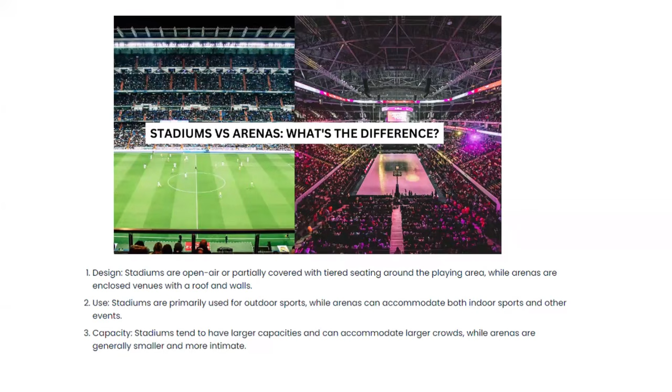So, in summary, there are a few differences. Stadiums are open, but arenas are enclosed venues. Stadiums are primarily used for outdoor sports, but arenas may be used for indoor sports. Stadiums have large capacities, but arenas generally have smaller or medium sized capacity. These are the few differences between arena and stadium.

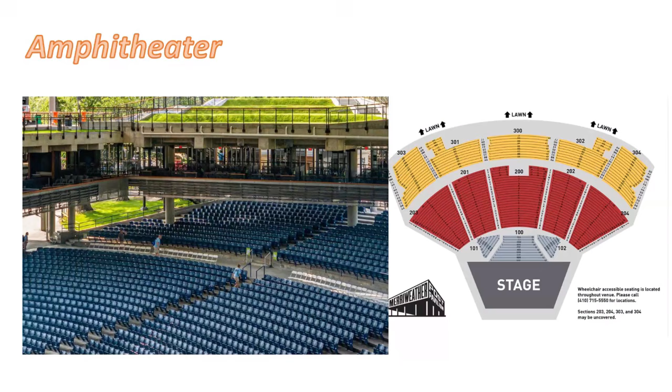One more term you should also know is the amphitheater. An amphitheater is a circular or oval shaped open air venue with tiered seating, arranged in a curved or elliptical manner. It usually surrounds a central performance area. Amphitheaters are historically known for hosting events like gladiator contests, concerts, chariot races, etc. The most famous amphitheater is the Colosseum in Rome. Amphitheaters are designed to accommodate a large number of spectators, also providing good visibility of events in the central area. So arenas, stadiums, and amphitheaters are all types of venues used for various events, but they have distinct characteristics and purposes. You should be familiar with these terms if you want to do IBS design.

So now the question comes, what makes a stadium so special? As I said, stadiums are venues which are completely different from other in-building scenarios. They have particular needs and challenges. Any design engineer should understand these needs and challenges in order to create a suitable design, because in a stadium, people with different backgrounds, interests, and expectations meet, and they should have sufficient wireless connectivity and quality of service. So stadium is very special.

You can see here we have various communities in stadium. The first community is visitors. Visitors come to the stadium for either an event, a match, or simply as a tourist wandering around. They normally make use of sitting area spaces, or in case of concerts, use of the play field. During halftime periods or breaks, they might access food areas, bar areas, or toilets as well. Often some of them want to share the latest goal with friends who couldn't come to the stadium, and they also make use of their mobile devices to send streaming data, pictures, or SMS. Moreover, in stadium we have VIP visitors as well, so we have to take care of them too. Sufficient coverage and capacity should be available in stadium for visitors, not only voice but also heavy data use.

Then we have stadium operations. What is stadium operations? Stadium operations refers to the personnel who work for the stadium on a daily basis. They also need to have coverage and connectivity, especially inside their offices. They may include people who work at the front office, stadium maintenance staff, or security guards. So they also need coverage and capacity.

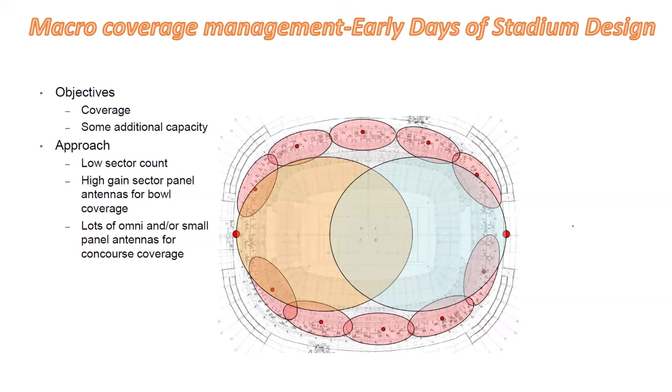Earlier, the focus was only on coverage. So the approach was low sector count, high gain sector panel antennas for bowl coverage, and lots of omnidirectional antennas for concourse coverage. We may have had strong signal from the macro sector pointed towards the stadium back in maybe 1999 or 2000.

But you want IBS to be dominant because in addition to coverage, you are concerned about capacity as well. So one approach is to put many IBS antennas, but that will be an expensive solution.

So now here in the figure, you will see a yellow area, right? This is the area where macro signal is very hot. Then a part of the stadium is in darker color, meaning the signal is not so hot from that sector. So what do we do for this yellow area? We want IBS dominance, so what to do with this yellow area?

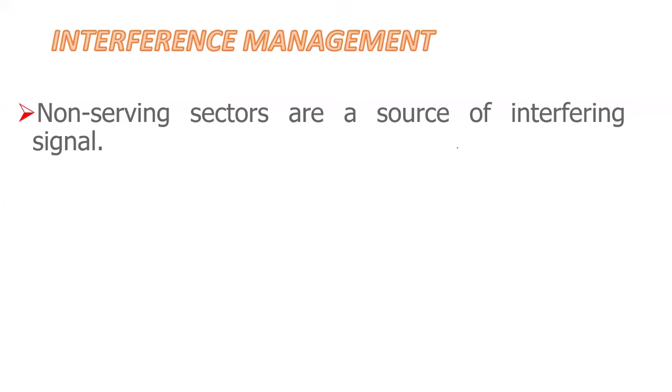Then we have interference management. Non-serving sectors are a source of interfering signals. Interference can be internal, from non-serving sectors, and external, from the macro network. Minimizing interference improves both network capacity and maximizes the achievable data rates. We'll see in a few minutes the steps to reduce interference.

So now moving on to handoff management. First of all, as discussed, we want IBS to be dominant. So we do not want any handover with macro sites inside the stadium, which would worsen network performance. But handover is required, right?

So now whether we are going to hand over at a stadium entrance or at a high traffic area outside the stadium, this is really a matter of observing the pattern of spectators before and after the game. For example, in North America, they tend to linger before the game quite a bit. In that case, you really would want to move the handover area away from those places where they tend to linger. Meaning, don't let them hand off at the tailgate area or a car parking lot area. Try to get the handover further away from there.

And if it is more about European style soccer fan behavior, where they get in and get out of the stadium rather quickly, then the handover can be at the stadium entrance as well. What are the rules for the handoff management? So establish clear handoff areas between the macro network and the stadium network in the transit area outside the stadium. So once a subscriber hands off from the macro network, he should remain with the stadium network throughout the duration of his visit to the venue.

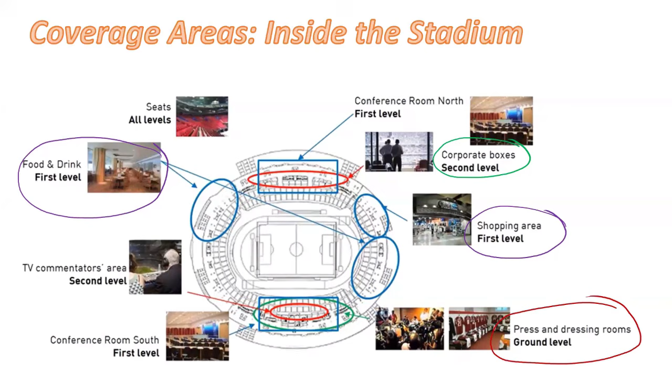Then underneath the bowl, what we have is the food and drink concession area, and also we have shopping area. Usually they are located at the first level near the entrances, because that is the first thing that spectators go in, and they either buy a souvenir, food or drink. So what we have deeper down in the bowl of the stadium is ground level. So here we have press rooms and dressing rooms for the two teams that play. They have to be covered as well. So these are all hotspots that require coverage at the stadium. So we are not concerned only with the bowl areas, but other areas as well during the stadium design.

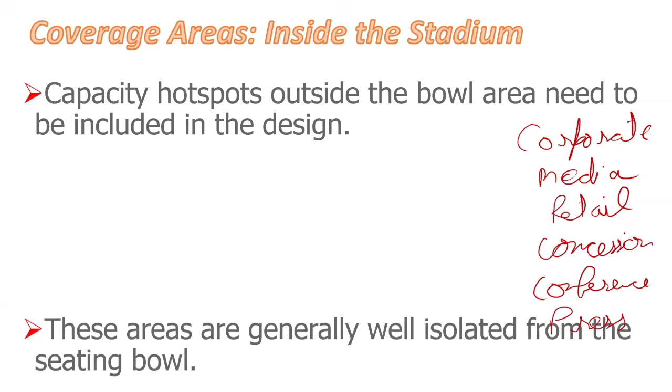Therefore, capacity hotspots outside the bowl area need to be included in the design. It may be corporate boxes, media boxes, retail shops, concession stands, capacity hotspots like conference rooms, or press rooms. So all these hotspots should be covered. These areas are generally well isolated from the seating bowl, so they need their own antennas for coverage.

And RF propagation characteristics in the stadium hotspots vary considerably. Inside the bowl, signal from DAS is clearly in line of sight with the UE. But in the back office, where the conference and locker rooms are located, wall density is much higher. So there is significant non-line of sight propagation. So we should take care of these things as well during our design.

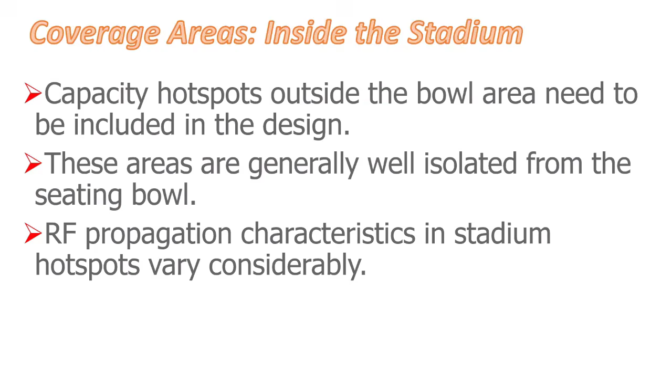Then we have call blocking. As I said earlier, the existing RF coverage coming from surrounding macro sites is fair in the bowl area, but poor below it, like in back offices, in conference rooms, in the concession area. The macro sites that cover the stadium report high call blocking during venue events. Anyone, what is blocking rate? Can you please write in the chat box?

In the busy hour peak, that is during the event. The call blocking problem is not restricted only to the stadium building, but also occurs in the stadium areas where spectators congregate before and after the event. These transit areas include parking lots, train stations, pedestrian walkways, etc. Right? The stadium needs to provide coverage and capacity both to the stadium and to the nearby transit area.

The network should be able to support traffic when the stadium is at full capacity during an event, and also the traffic near the venue before and after the event, right? So pretty much all the areas where spectators tend to linger before or during the game break. This is especially of interest in North America, where tailgating is a prevailing phenomenon in college football games and professional football games. So we must take this into account as well.

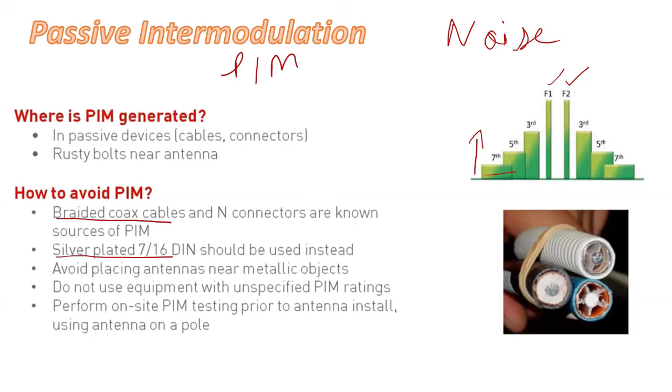So how to avoid them? First of all, we should not use braided coax cables and N connectors because they are a known source of PIM. Instead, silver plated 7/16 DIN should be used. Also, avoid placing antennas near metallic objects, including rusty bolts. Do not use equipment with unspecified PIM rating. And prior to antenna installation, on-site PIM testing should be done using an antenna on a pole. This is covered in more detail in my previous sessions as well. So these are the points related to intermodulation that we should take care of.

So neutral host networks with high transmit powers are susceptible to passive intermodulation. And if PIM noise is sufficiently high, it can reduce coverage, it can slow the network, it can cause dropped calls, and it can reduce battery life as well. So we should consider this during the stadium design.

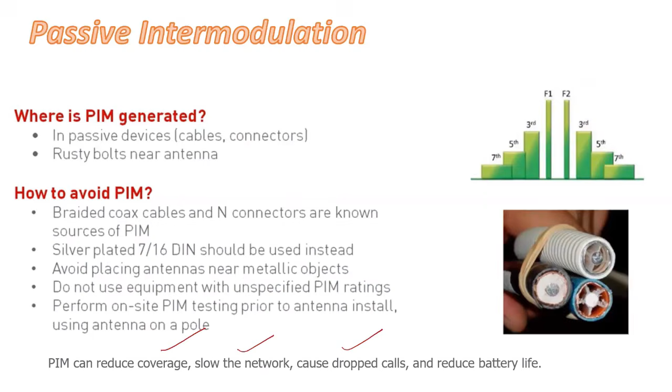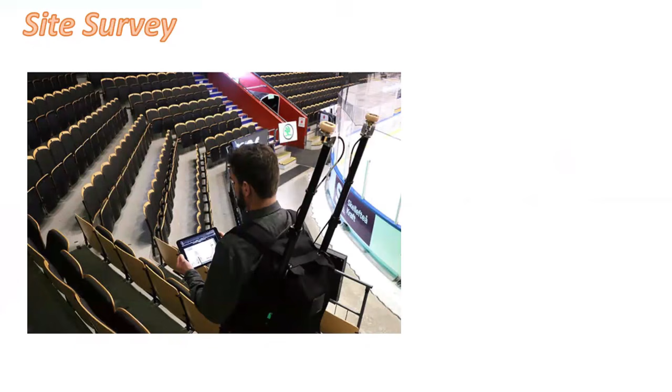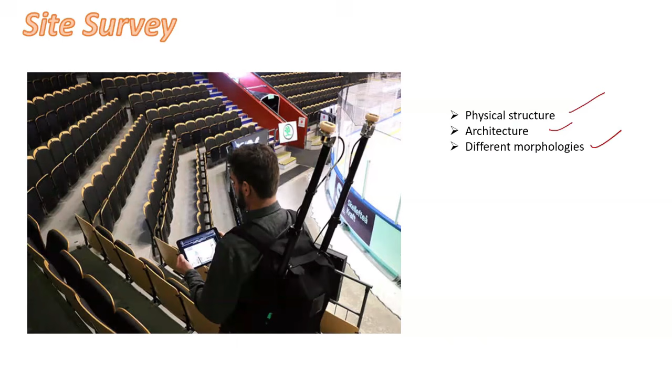Now let's talk about best practices related to the site visit. First thing is the site survey. The site survey is one of the most important steps for design, especially for IBS design. During the initial site visit, different kinds of information are gathered. Information about the physical structure, architecture, and the different morphology within the venue is gathered. A lot of information is captured in the form of photos, videos, handwritten notes, measurements from various data collection tools, and text annotations.

So potential locations at which to mount antennas, run cables, and install equipment are also covered in the site survey. During the survey, the existing macro radio coverage at the venue should be recorded for all the wireless carriers, including all frequency bands of interest. This is an important part of the survey because the stadium network has to overcome the macro coverage by a comfortable margin. Otherwise, the UE may be registered with the macro network while at the venue. This is a highly undesirable situation because our major requirement is to offload the macro network.

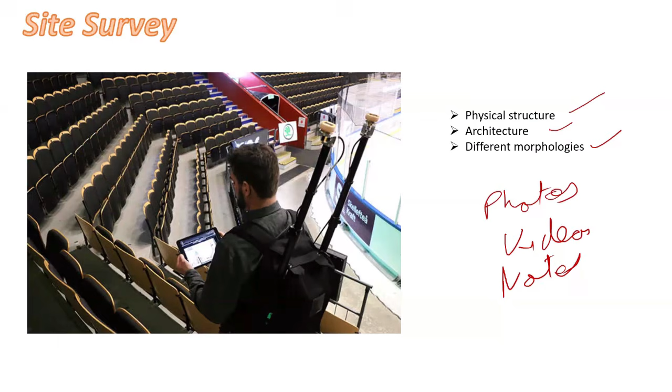So during the site survey, in addition to RF data, the engineers need to identify spots where antennas may be mounted, identify a room big enough to house the head end, and identify potential cable paths between the head end and the antennas.

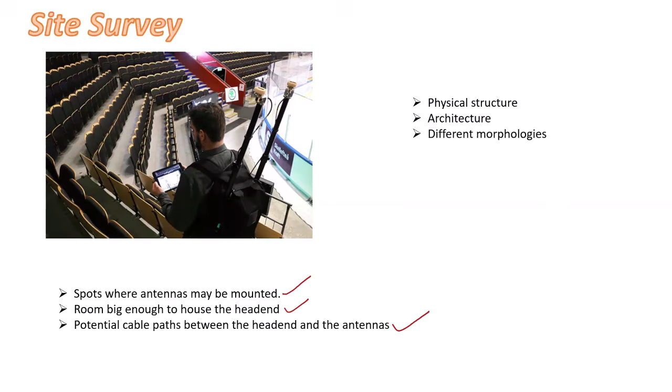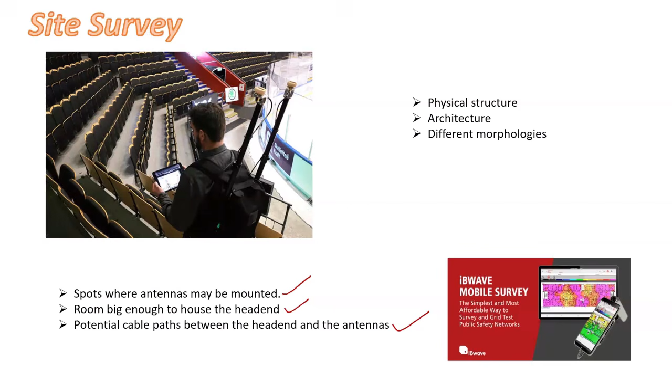And recording the information directly onto a floor plan saves a lot of time. For that, you can use iBwave Mobile. It helps information exchange with other departments and the stakeholders as well. So it's also important to identify several locations at which to mount antennas, because that can be used later on when you do the detailed RF coverage, right?

Here you can see an example of data collected by an engineer during a site survey. So this is a photograph of a general area of a potential antenna location in the seating area. So you can see that in this particular area, we want to mount antennas and we want to cover this particular area, right?

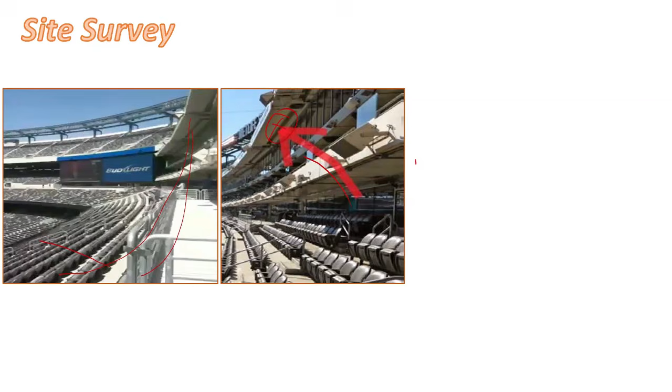So this second figure zooms in on the location and you can see a red mark where you can put your antennas. So the location needs to be identified on the layout plan as well, so that the RF design engineers can know where they can put their antenna. So here you can see a red mark and here the engineer is pointing that we should put our antenna in this particular area. And then in the third figure, you can see the venue layout displayed on a tablet. A red push pin indicates the antenna location.

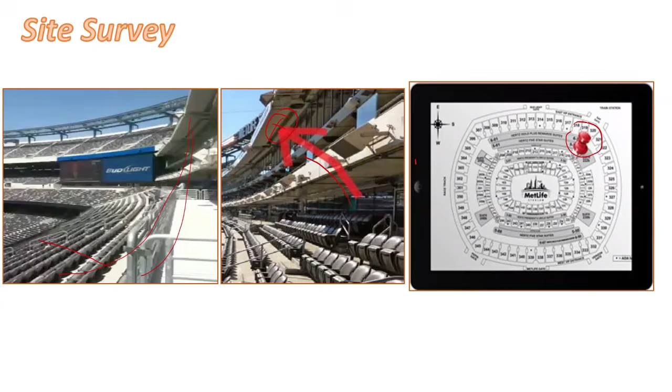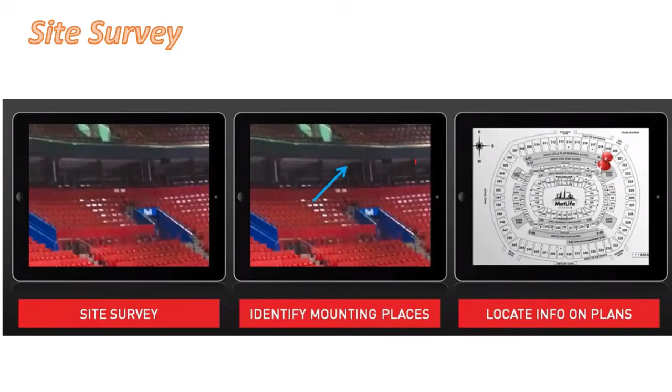Trust me, when you are at the site, you remember everything. But the moment you reach the office and start modeling, you forget everything. So these notes are very important. So again, a site survey is basically what you need to do when you first visit the site. Examine potential locations for the head-end room and the equipment, potential locations for remote units and possible cable pathways. You also need to identify mounting places for your antennas. All that should be noted on a plan, preferably in digital form, so that it can be uploaded to the cloud and shared with other engineers as well.

So aside from the site survey, an RF survey should also be performed, because we said that there may be a residual macro signal at the venue. So we need to know how strong that signal is. So taking RF macro surveys throughout the bowl areas and also underneath in the shopping areas, in the VIP boxes, in the press areas and in the dressing rooms is a must.

And now lastly, a CW test should be taken. So guys, what is CW test, or what is continuous wave testing? Can you please write in the chat box? Okay, thanks for the right answer.

So typically CW testing is the first phase of any RF planning. RF planning always starts with the continuous wave testing method for all greenfield projects. The main aim of doing CW testing is to gather information. And why gather information? So that we can design a propagation model of transmitted signals for mobile communication. It is carried out to gather actual propagation of mobile signals in different terrain or clutter. So therefore, CW drive testing can be used for propagation model tuning.

So if we identify a possible location, we should try to put an antenna there, inject a CW signal there and then take CW coverage data. And this data will then be used to calibrate the propagation model in a software tool of your choice. I have done it many times in the iBwave tool, but you can do that in other tools as well. For macro, I have used the Atoll tool, Planet tool and Asset tool for model tuning. But for in-building, mostly I have used the iBwave tool for propagation model tuning.

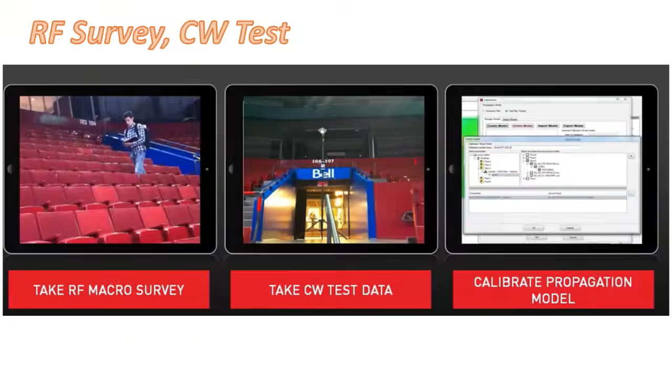Then we have 3D modeling. So stadium 3D modeling, right? With the help of 3D modeling, we can verify the accuracy of the building model, right? It can be with respect to scale or alignment of walls and surfaces. It helps simulate walking through the various floors to see the installed components and the walls. Moreover, it can be used as image files for documentation purposes.

So this is an example of one of the 3D models I have done. To do this, you should have thorough knowledge of the venue. 3D modeling is not that easy, but you should have good knowledge of the venue.

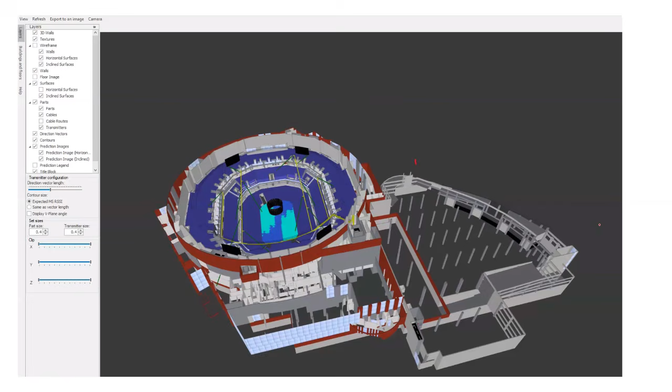You should know which venue you are modeling, whether it's offices, hotels, shopping malls, stadiums, metros, subway. And what is modeled? Walls, floors, stairs, escalators, stadium sitting areas, building textures. And you should understand what kind of material to be used, be it cinder block, concrete, drywalls, lockers, metal, glass, window. So you should have thorough knowledge of everything.

So before modeling, we must understand the architecture by doing site visits, if possible, watching images and videos using Google Earth, using AutoCAD files as well. So we must section the stadium by floors, and we must have each floor on a different floor plan. So when modeling, we must scale each floor alike. Why? So that all floors align properly.

And when importing walls, we must remove any kind of double walls and unnecessary materials. And when creating stands, we must create them by using the inclined surface. Also, keep any pictures or references nearby to model the building as accurately as possible. In addition to that, you have to take care of these pillars as well, because they play an important role during the 3D modeling and especially for RF propagation.

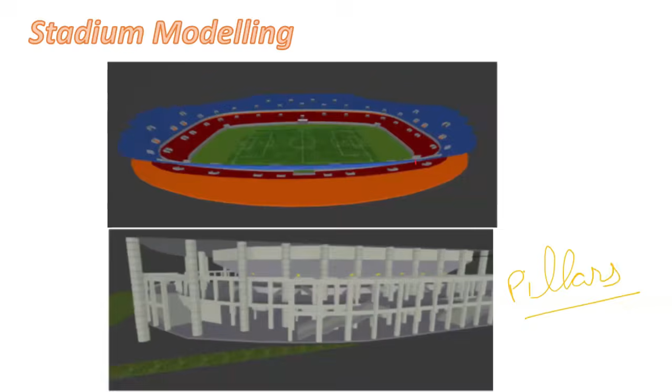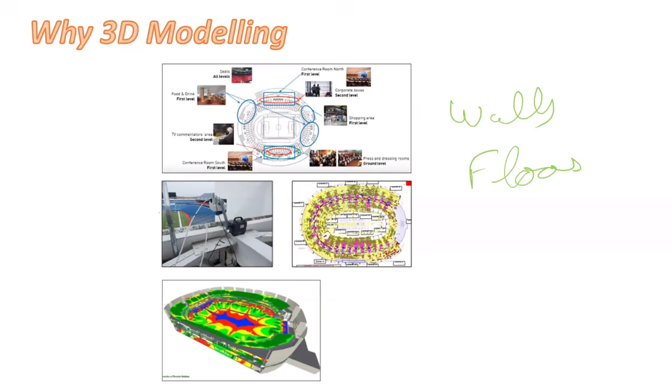So again, with the 3D modeling, you can obtain the visual representation of a building. This ensures the walls, floors, etc. and scale specified are correctly represented for this building. So with 3D modeling, you can see the current layout plan, the entire building, all the floors, levels of this building, selected floors of a building.

And as I mentioned earlier, stadiums are multi-level structures that contain a wide variety of RF propagation environments. The most significant area is the sitting bowl. It is modeled as an inclined surface. You can see here the inclined surfaces, right? And you can see here in this also inclined surfaces, this blue area, and on the left side you can see layers, building and floors, and you can play with this in the iBwave tool.

So it is modeled as an inclined surface so as to take into account the differences in the elevation between the rows of the seats. And UE in this area will have a clear line of sight to the serving antennas. That's why they are positioned above the seats, right? So these are the inclined surfaces.

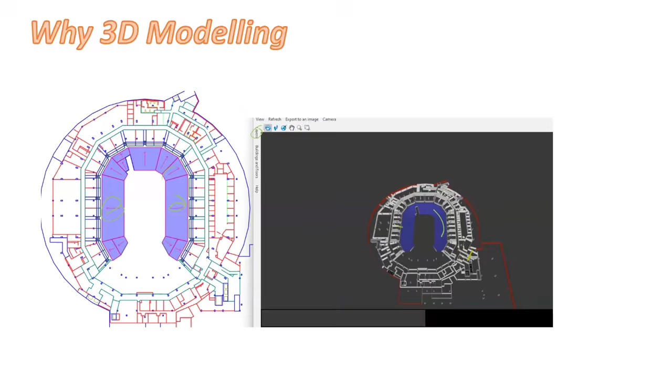So we need to recognize that a stadium is not only multi-level but also a very heterogeneous RF environment. So what we have is a horizontal surface and a combination of line of sight, non-line of sight, and diffraction as well. So this is best analyzed if you build a 3D model of it and then allow the propagation to take into account all those different RF environments, because interfering signals will be coming from all levels and from various directions.

Also, the detailed 3D model is going to help quite a bit in getting an accurate bill of materials. We call it BOM as well, which is bill of materials. Because you want to deal with the cable length estimates as well. The closer you can get to the real value, the better off you will be in the long run.

So making a 3D model of a venue can take anywhere from maybe 5 hours for a small venue to maybe 20 hours or more for a complex venue. So it takes a lot of time to do detailed modeling, but it is necessary, especially for large stadiums. So proper modeling of a venue is important not only for propagation analysis, but also for good bill of material estimates, such as length of coax or the pipe.

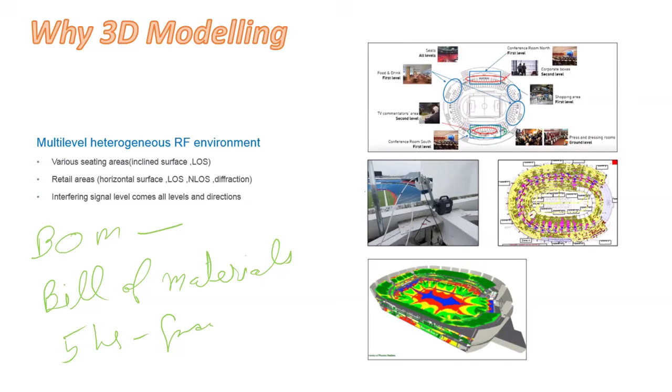Then we have to talk about sectorization. So generally what we do in stadiums, as the stadium already has DAS, we can add new sectors, we can do DAS upgrades, like in CommScope we are doing ION-U to ION-E upgrades. We can add millimeter wave radios for capacity. We can add C-band for capacity. But in this session, we are assuming that this is a completely new stadium. So we have to design the stadium from scratch.

So as I said earlier, the stadium is a densely populated venue. So we obviously can't cover the whole stadium in one sector. So we need to split that into smaller areas with lots of sectors. So in order to cover those small areas, we should have many separate sectors. So that is how we actually handle capacity.

So this example that I showed here is a stadium with 65 sectors. So some sectors are in the admin and at the lower level, some sectors at the bowl, at the concourse level, 3 sectors at the field events, and 8 transition zones, maybe at the entrance of the stadium, right, for ingress and egress.

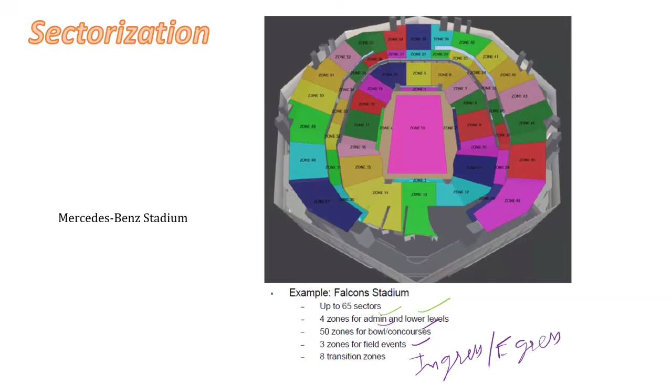You can talk about that thing as well, right? So basically each sector serves 2,000 to 3,000 subscribers. So it is not unusual to see such a large number of sectors in a stadium. This was an assumption that was covered later on in the capacity dimensioning as well. So each sector can cover 2K to 3K subscribers. So here in this stadium, the Mercedes-Benz Stadium, also known as Falcons Stadium, we have around 75,000 seats and we have proposed 65 sectors.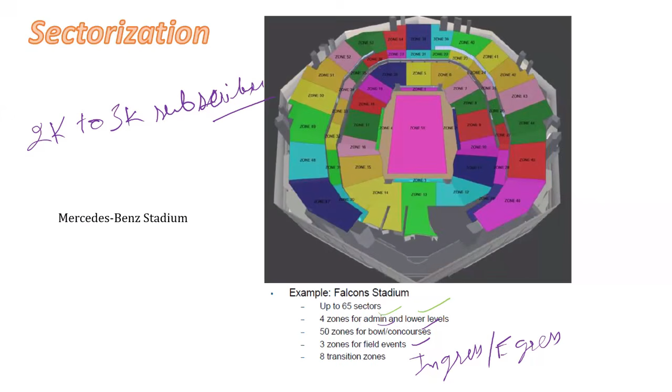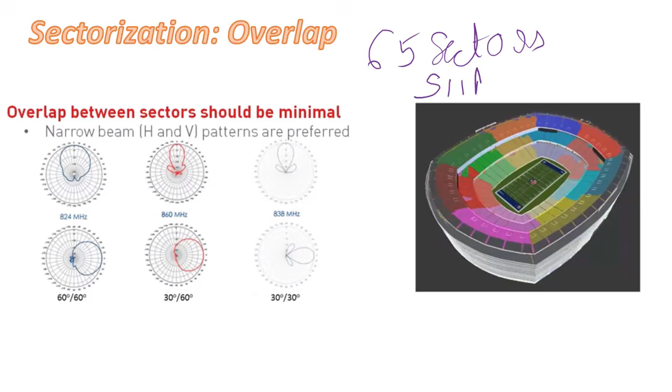Now, sectorization overlap. What we need to make sure is that overlap between those sectors is minimal. As I said in the slide before, we have around 65 sectors. If there is too much overlap between these sectors, it can increase our interference, and finally it will reduce our SINR. And if SINR is reduced, then our throughput will be reduced, because SINR and throughput are closely related. At a high level, you can say that capacity is equal to bandwidth times log(1 + SINR), right? According to Shannon's law. So if our SINR is affected, our capacity will be affected.

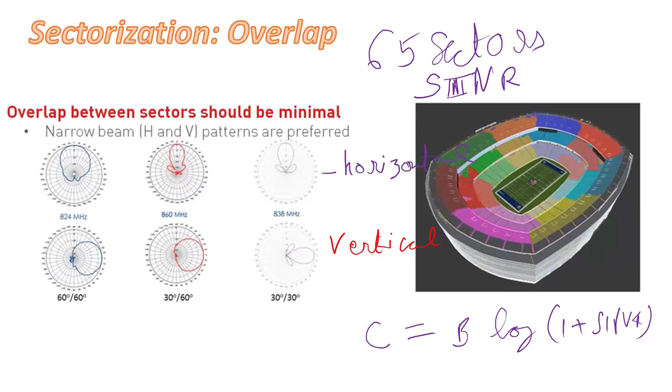So for that, we have to use antennas that have a narrow beamwidth. You can see here in the figure, I have given 3 types of antenna patterns and they are grouped in pairs. The upper one is horizontal and this one is vertical. Okay. So the first one is 60-60. The second one is horizontal 30 and vertical 60. And the last one is horizontal 30 and vertical 30. So these are the types of antennas with narrow beams that you would want to use to isolate those sectors. What is the aim? The aim is to minimize the sector overlap.

Again, what's the purpose of sectorization? Sectorization has a dual purpose in the design of a radio network. First and foremost, it increases network capacity. Why? Because each sector has its own channel cards capable of carrying voice and data traffic. Sectors are assigned specific areas to cover and serve a specific number of subscribers. The actual area to be covered and the actual number of subscribers that a sector should serve is a part of capacity dimensioning. We may go through various parameters soon, like number of channels, right?

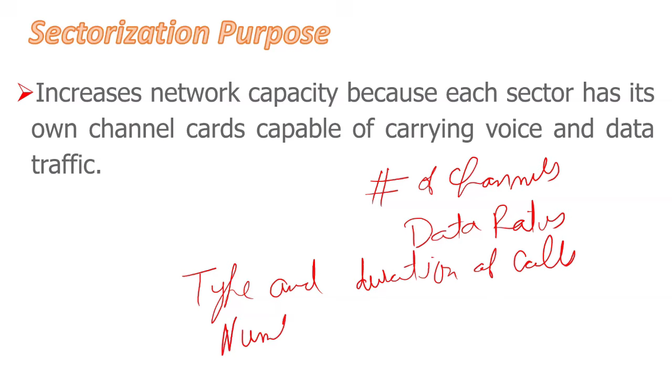You can say data rate, then type and duration of calls, and various other factors like number of seats, the penetration rate of a carrier, and it may also be dependent on the mobile traffic profile, right? So these are all the parameters we'll see in the capacity dimensioning as well, and there may be more parameters. So the important parameters are number of channels per sector, data rate, and the type and duration of calls and data connections. In addition to that, we have parameters like number of seats, carrier subscriber penetration rate, and the carrier's mobile traffic profile as well. Okay.

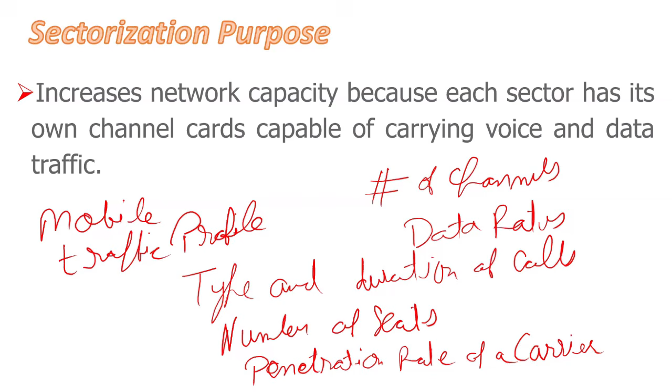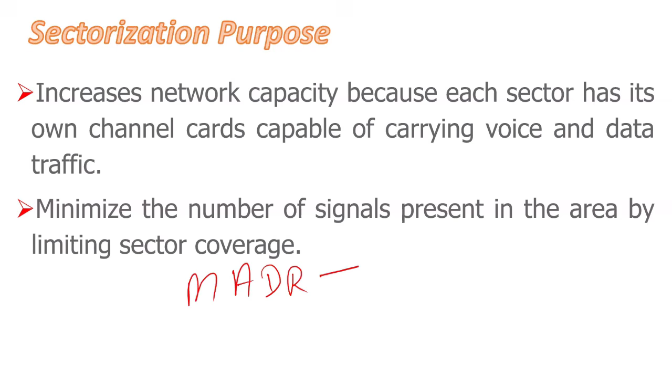And the second purpose of sectorization is to minimize the number of signals present in the area by limiting sector coverage. Limiting the coverage also limits the interference from non-serving sectors, and it will improve capacity, SINR, and the maximum achievable data rate, also called MADR. We'll see it in the KPIs. MADR, maximum achievable data rate. So in LOS areas like the seating bowl, sector overlap minimization is achieved by using highly directional antennas. Okay, always use these directional antennas.

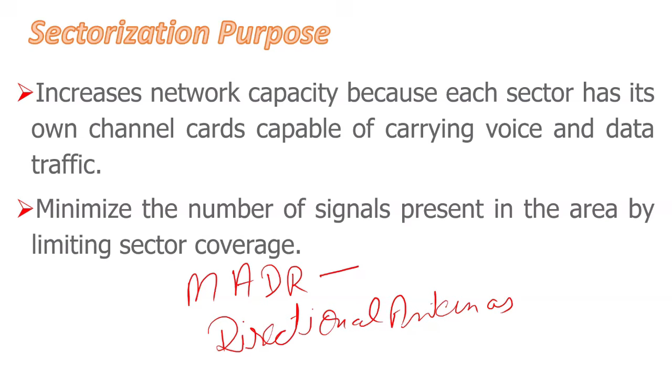So mostly when I design, I try to use this wedge technique. I like the wedge technique because in the case of horizontal, interference may be increased, but in the case of wedge sectorization, it may be possible to reduce the interference. Moreover, generally the public don't have access to all areas in the stadium. So they don't move like this, right? They move like this, right? So that's why I like wedge sectorization. And the advantage of this kind of sectorization is that it can reduce extensive handovers between the UEs.

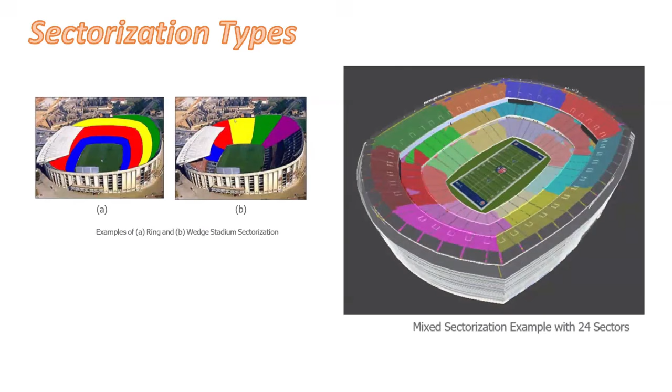But if a significant number of sectors are required, then hybrid ring and wedge sectorization is the best option. You can see here examples of sectorization, which is mixed wedge and ring, and we have around 24 sectors.

Then we have this stadium design methodology. As we discussed earlier, stadiums are very different compared to other in-building venues, so their design methodology is also a little bit different. But the steps are similar compared to other venues. So the first step is define the requirement.

As a first step, we must define the targets for our stadium system performance, and this is done by defining the requirements. Examples of such requirements can be what coverage level is required, and in which areas coverage is required. Some areas you require maybe negative 95, some areas negative 85, negative 75.

Then you should also do the leakage consideration. Then you should also know the expected number of users, the traffic profile, and also have knowledge of peak traffic demand. So you should consider all these things while defining the requirement.

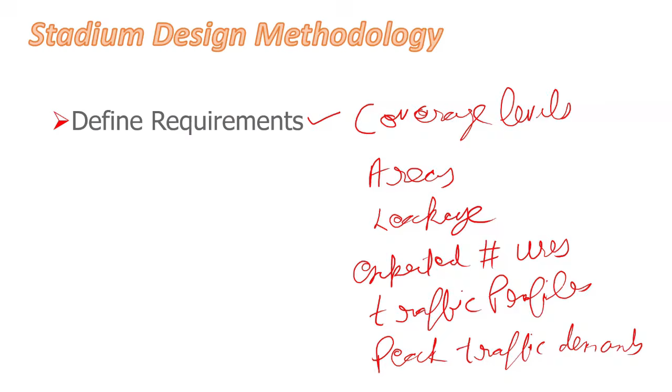Then we have design for coverage. Definition of coverage boundaries, sectorization areas, and prediction of signal strength is also required. The aim is where to put your antennas, where to install them. Also, various characteristics, radiation patterns, and transmit powers of the antenna must be defined, and for this a suitable propagation model should be used.

And we have discussed about the continuous wave testing. Based on that, we can calibrate our model in iBwave, and for that, model tuning is also required. Otherwise, there is a high risk of spending too much time and not getting all the valuable samples that are needed.

Then we have design for capacity. Not only having sufficient signal strength is required in a stadium, but also the capacity, since many people will use video calls, data download, sharing goals with their friends. So all these node capacities, maybe email, maybe WhatsApp, will be taken as a basis for selecting base station equipment as well as a suitable distribution system which can guarantee scalability in the future as well.

After that, we have to optimize the performance. Once the preliminary design for coverage and capacity has been done, antennas have been selected, propagation predictions have been made, and sectors have been defined, then we have to do the optimization to tweak the performance of the system and to maximize it.

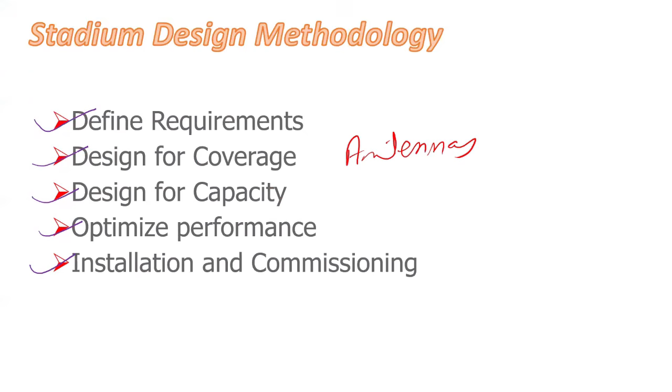There may be some sub-steps as well, but these are the high level steps for stadium design methodology. Before going to actual sectorization, we have to talk about the PRBs as well - physical resource blocks. I know you may have good knowledge of PRBs, but it's important to refresh this because these parameters will be used during actual capacity dimensioning, and it will affect our number of sectors required for capacity dimensioning. So let's talk about PRB.

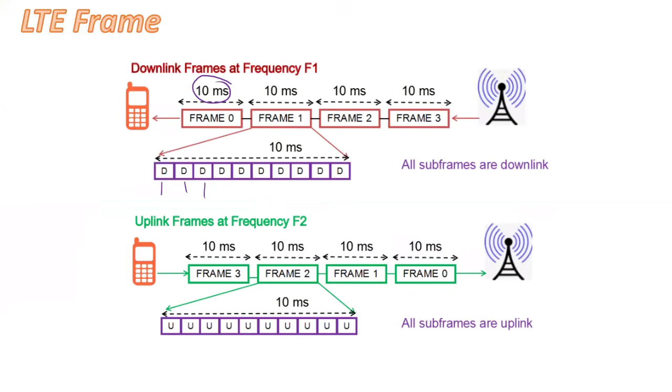As you know, in case of LTE, the radio frame has a length of 10 milliseconds, and each frame is divided into 10 equally sized subframes of 1 millisecond. So each subframe is 1 millisecond in length. The smallest time-frequency grid for downlink transmission is called the resource element, and it is one symbol by one subcarrier. Then we have this resource block.

So what is a resource block? A resource block is a group of 12 contiguous subcarriers in frequency and one slot in time from the time domain. Data is allocated to user equipment in units of resource blocks. Thus, an RB has 84 resource elements, because we have 12 subcarriers multiplied by 7 symbols, which is 84 in the time domain. And in the frequency domain, a resource block has 180 kilohertz because we have 12 subcarriers into 15 kilohertz subcarrier spacing.

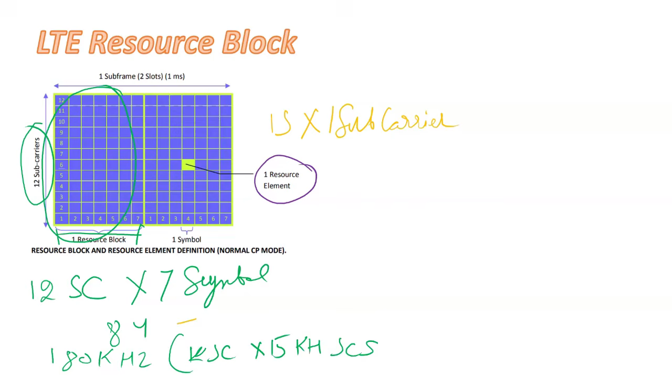So it is equal to 180 kilohertz.

In case of LTE, scheduling is done on a subframe basis, and subframe length is 1 millisecond. So we need two resource blocks. Given that a TTI lasts for 1 millisecond, the eNodeB scheduler allocates PRBs to users a pair at a time, so two resource blocks are allocated at a time. At a high level, one PRB is equal to two resource blocks, and one PRB is allocated to users for scheduling purposes.

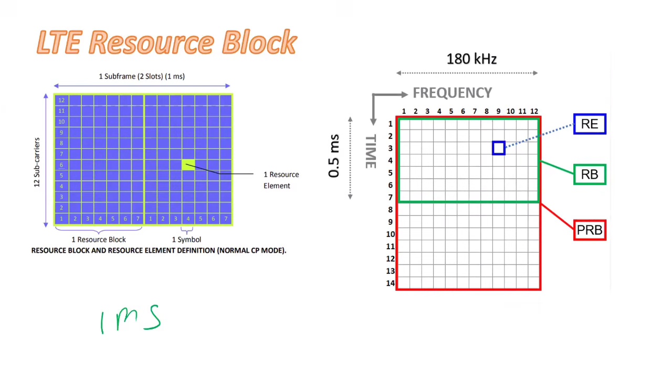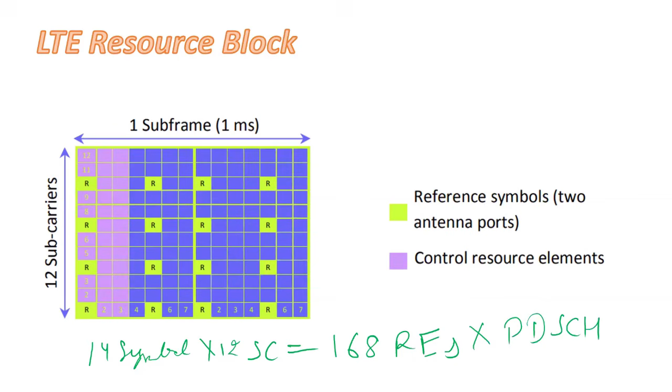We have 14 symbols and 12 subcarriers, so we have a total of 168 resource elements. But remember, all 168 resource elements may not be used for data, or you can say all these elements will not be used for the PDSCH channel, which is our data channel. Some are overhead as well, so we have to take care of that in our capacity dimensioning.

In case of 5G, you should also take care that there is a concept of a slot. In one slot, we have 14 OFDM symbols, and on the frequency side, we have 12 subcarriers. In case of LTE, our subcarrier spacing is fixed at 15 kilohertz. But in case of NR, we have various options available: it may be 15, 30, 60, 120, 240, and so on. Based on that, our carrier dimensioning will be affected, since the number of slots is affected, and this will affect our capacity dimensioning as well. You should know this information as it is needed in our dimensioning process.

Let's move to capacity dimensioning. As we discussed earlier, let's see, I think somebody has put something in the chat box.

For stadium optimization, iBwave is mostly for design, but if you have iBwave certification, it will help you in stadium optimization as well. As far as sizing is concerned for LTE and NR, it depends on your throughput need. SINR is directly proportional to capacity, so if your SINR is high, your throughput will be high. So your throughput needs determine your SINR requirement. For example, if your throughput need is 10 megabits per second, the corresponding SINR may be 2 dB. But if your throughput requirement is 100 Mbps, the SINR requirement may be 20 dB. So it depends on your throughput requirement in a particular stadium, and SINR is dependent on that requirement. Have I answered your question?

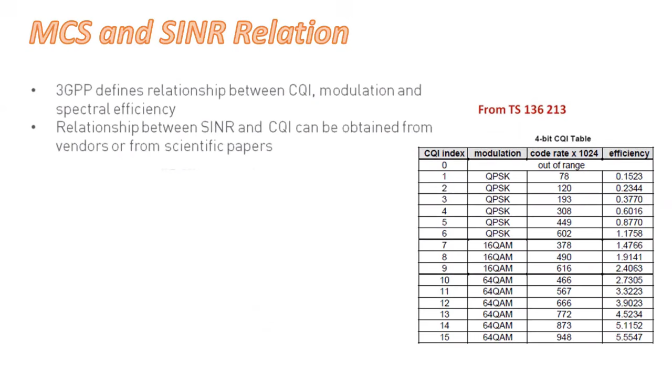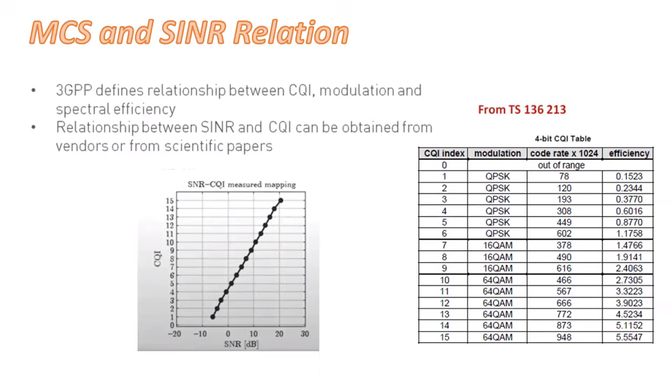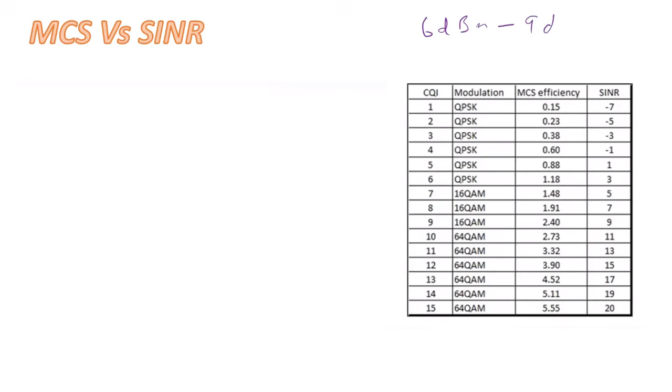For capacity dimensioning, a downlink LTE SINR coverage map must be calculated. Combining the previous two tables, we get the spectral efficiency versus SINR table. As someone was asking, how much SINR is required? Generally we consider SINR of 6 dBm to 9 dBm as good, but according to throughput requirements, we can choose our SINR. You can see here we have around 15 CQIs, and according to SINR, if it's high we can have 64 QAM, meaning 6 bits per symbol. 16 QAM means 4 bits per symbol, and QPSK means 2 bits per symbol.

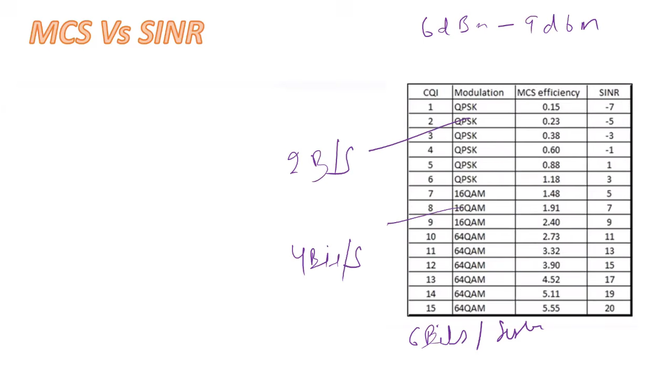So when we combine those two, we get a table showing modulation and SINR, a big table with 15 entries. I simplified that into a table with only 4 entries, where CQI is 6, 9, 12, and 15. So this big table with 15 entries I've turned into 4 entries, where each SINR range has a specific modulation scheme with a specific spectral efficiency value. The dependence of spectral efficiency on SINR is important because spectral efficiency ultimately determines the maximum achievable data rate.

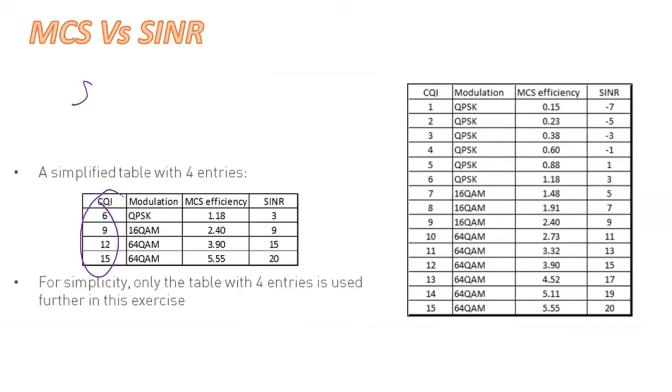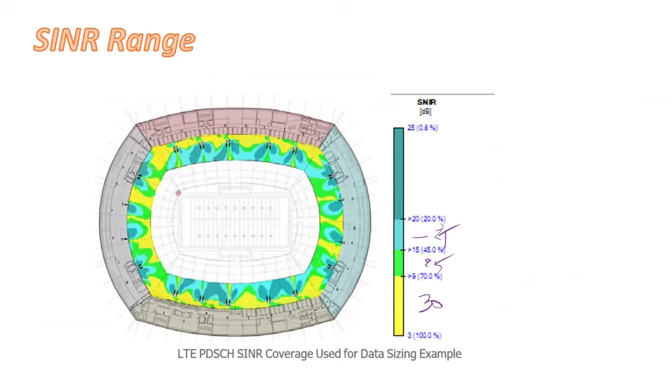If you know that spectral efficiency is throughput divided by bandwidth, right? So higher the spectral efficiency, higher the throughput. Then we have to take care of SINR range as well. For example, for SINR range between 3 and 9, we have chosen area around 30%. For 9 to 15, around 25%. For 15 to 20, again around 25%, right? So this way you can choose. So some assumption may be made about the number of sectors that can overlap, because an overlap affects your SINR.

So next step is to figure out how many PRBs are needed to support those listed service types: email browsing, video conferencing, data downloads and video streaming throughout the stadium. We know what the required data rate is for each one of them, so we now have to figure how many PRBs we need for each of those applications. First of all, we have 4 different SINR ranges, and each of those ranges has a different spectral efficiency. It means I'm going to have a different number of PRBs needed to support those service types.

So for example, for SINR greater than 20, our MCS efficiency is 5.55. And PRB data rate is MCS efficiency multiplied by number of PDSCH resource elements divided by 1 millisecond. As I said earlier, 1 PRB is 168 resource elements, but not all of them are used for PDSCH, so we have to take care of the overheads as well. Suppose we are using 132 resource elements for data and our spectral efficiency is 5.55. So our data rate will be around 726 kbps.

Okay. So we have around 726, right? So you can see here for video streaming range 1, I put here 3. Why? Because for video streaming, I need 2000 kbps. For 1 PRB, I get around 726, so for 2000, I will need 3 PRBs. As we increase towards range 4, we need more PRBs because we have less efficiency, right? So this way, we can calculate our number of PRBs according to a particular range.

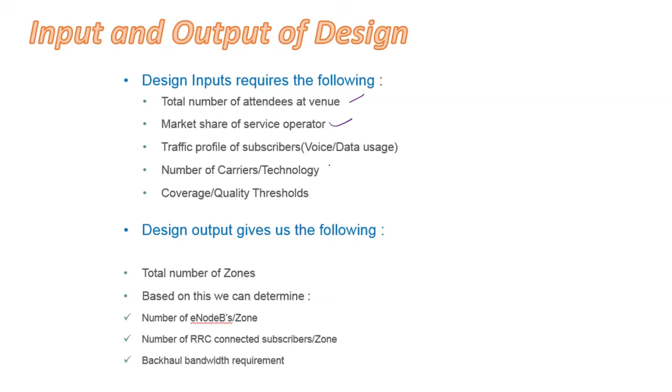So these are the inputs and outputs of a capacity dimensioning. You should know total number of attendees at the venue, market share of each service operator, traffic profiles, number of carriers, coverage, and so on. And output is number of zones. Since the theory is already discussed, you will get the number of sectors according to your number of subscribers and various other things like modulation, MIMO, efficiency, duty cycle, etc.

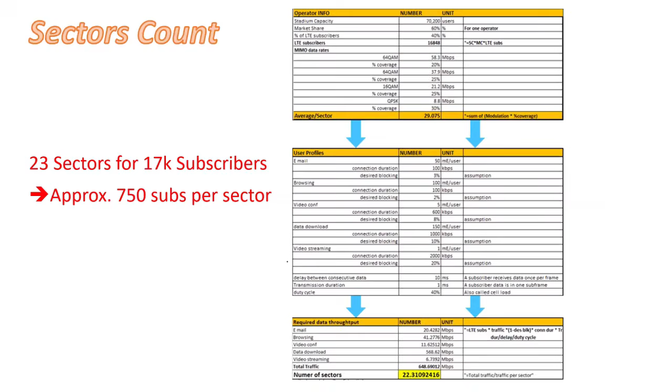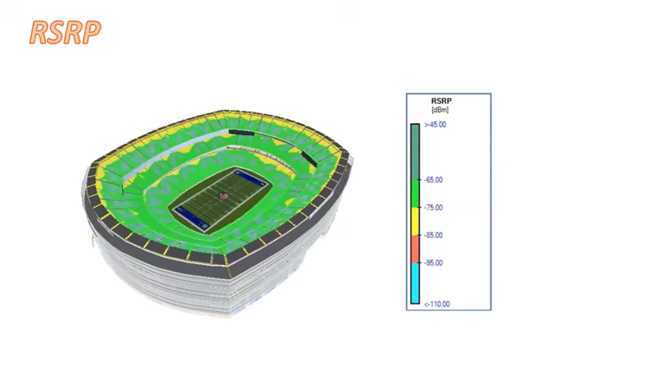And then let's talk about KPIs. First one is RF, RSRP. For the signal to be dominant at the venue, it has to be stronger than the residual signal coming from surrounding macro sites. As most stadiums are open area, the residual macro signal level itself is usually fairly strong. In our example, we assume that macro LTE reference signal is between -80 and -85. So we want our IBS signal to be more than -75 over 95% of the area.

Then we have SINR. As we discussed, the modulation scheme used in an LTE network is directly related to PDSCH SINR. High SINR makes possible higher modulation, and higher modulation means higher throughput. But a large number of sectors implies numerous sector overlaps, which may cause interference and lower SINR. You can see an example of 23 sectors. It looks very heterogeneous, lots of yellow and blue and green, because with high density sectorization you can only expect really good SINR very close to the antenna, and SINR gets degraded rather quickly at the cell edge, which is what you see.

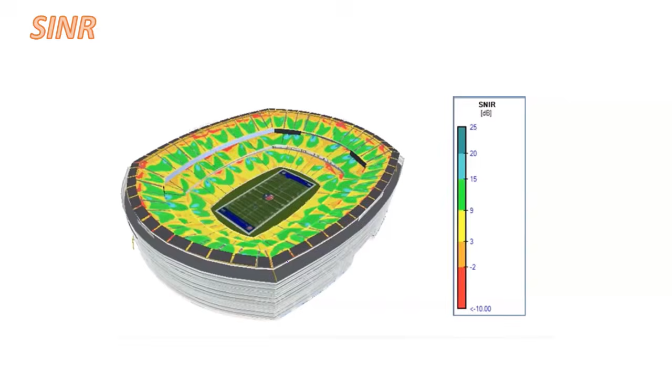So again, guys, this is a summary of what we have discussed in the class: stadiums, design requirements, target areas for coverage inside and outside the stadium, best practices, 3D modeling, sectorization, capacity dimensioning, and the KPIs.